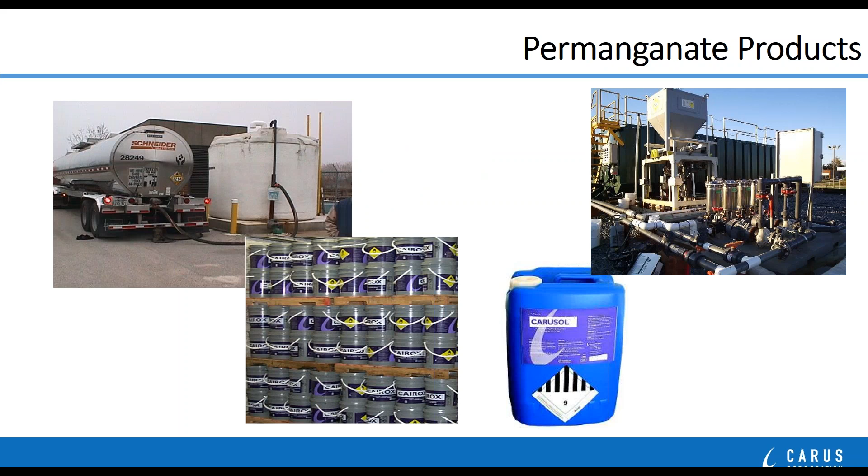The historic workhorse of the permanganate world is dry crystalline potassium permanganate. Potassium permanganate is the product that is manufactured at most manufacturing locations because it is relatively easy to drop out of solution at a very, very high purity. So our crystalline dry products are marketed under our brand name CAIROX, and we can offer a variety of different grades of this product as we manufacture and manipulate it in our plant here in LaSalle, Illinois.

So typically the first product that drops out is what we call technical grade material. Technical grade is always at least 98% purity, and it is a great product to use, in particular if you're going to be mixing the permanganate as a water solution and then feeding it as an aqueous solution or an aqueous liquid.

The sister product to technical grade is what we call free-flowing grade. So technical grade material is hygroscopic. That means that it likes to pick up moisture from the air. And so when relative humidity is high, such as in water plants or wastewater plants, it will have a tendency to lump or cake together after it's been exposed to the air.

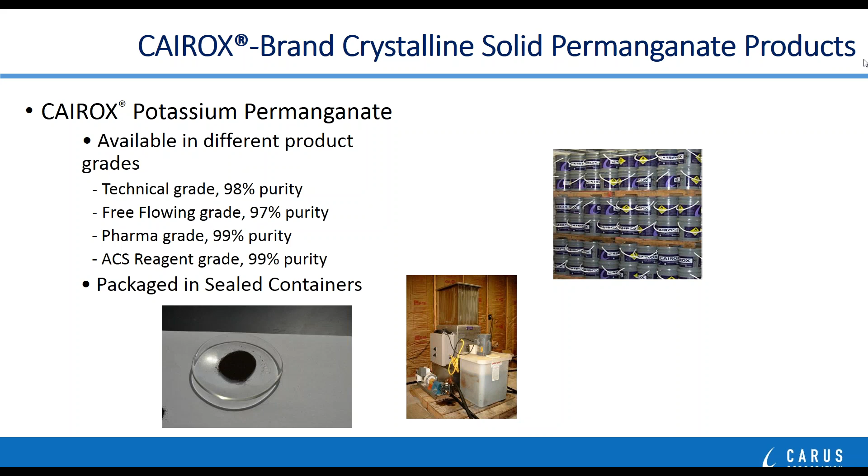So this is a less dusty material, and because the nuggets are heavy, when you broadcast them into the lagoon or pond water, they will tend to sink and treat the water all the way through the water column, and depending on the depth, they will often make it all the way down to the bottom of the lagoon. If that's where the problem is occurring, then we can treat down there at the lower depths.

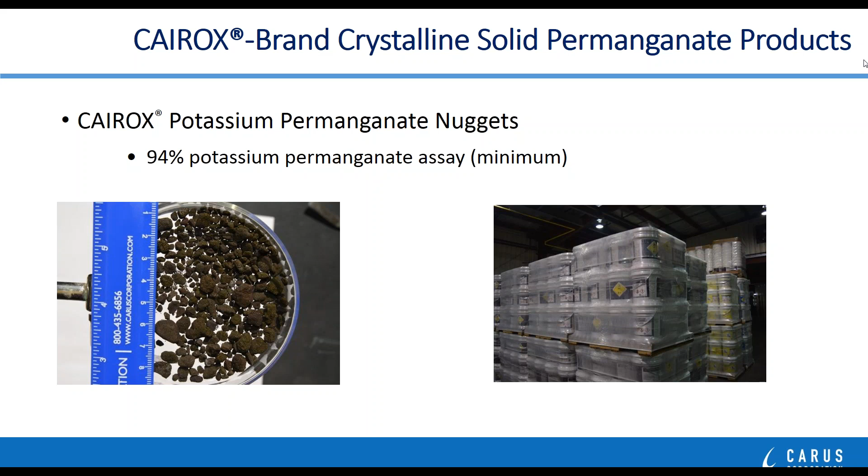The amount of permanganate released and the life of a tablet depends on the speed of the water flowing past it. So a higher velocity water dissolves the pellets more quickly. A slower moving water dissolves them slowly.

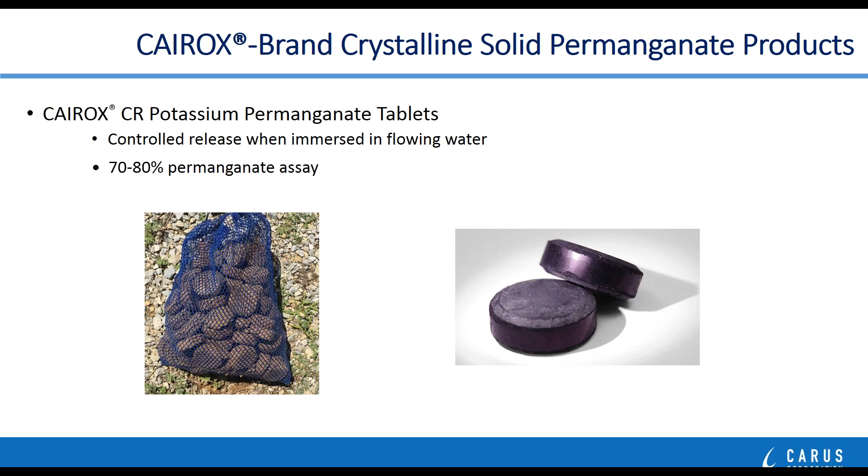If we move away from the dry crystalline products, then we can talk about pre-mixed concentrated liquid products that are available under our brand name CARUSOL. They are available in 2 different types of concentrations. The first is 20% active ingredient, and the second, CARUSOL C, is available as a 40% active ingredient.

In the case of both the dry crystalline material and these concentrated liquids, they're very stable when they're held or stored in their sealed package containers. The stability really is measured in months and in years, so that they can be stored and used over a long period of time.

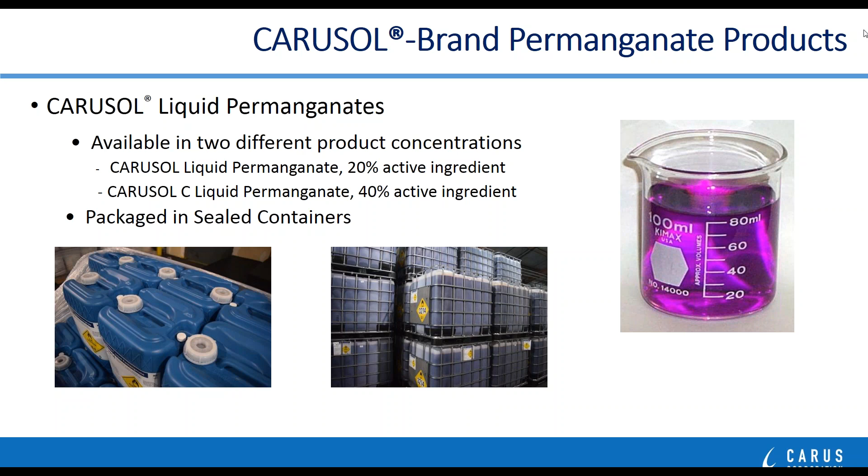So let's talk a little bit about what permanganate really is. The permanganate ion is MnO4-1, and it is available when you manufacture it in a variety of different salts. The two most common salts are the potassium permanganate, KMnO4, and the sodium permanganate, NaMnO4. But there are other types of cationic salts that you can make as well.

Permanganate is an oxidizing agent, and it's what we consider to be a stable oxidizing agent. That means when we manufacture it, we can put it into a drum, it can be stored, it can be delivered to the customer site and used at some time in the future. It does not have to be generated at the site where it's going to be used.

And we make permanganate by starting with manganese dioxide ore. It's a material that is mined out of the ground. Manganese is a common constituent of soils around the globe. And we add energy and oxygen to that manganese dioxide and raise the potential of it up until we get to the permanganate ion, MnO4. Now, when a customer buys permanganate and uses it, they are essentially extracting that energy and that oxygen out of the permanganate, and the permanganate returns to almost its original MnO2 form.

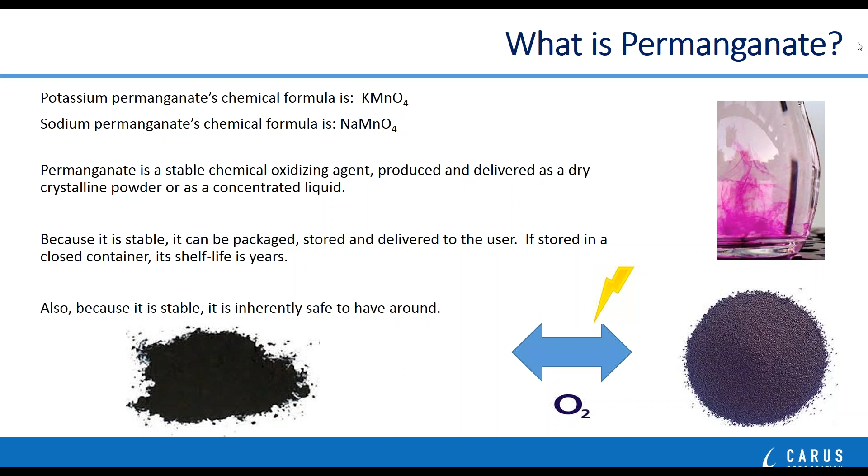From a chemistry standpoint, permanganate can be sort of lumped into one of two buckets. The first is, of course, that permanganate is a manganese compound. I mention that in particular because it can be confusing, because magnesium is also one of the common elements. Calcium and magnesium are the constituents of hardness in water supplies, but that's not what permanganate is. Permanganate is a manganese compound and is often regulated and controlled under that category.

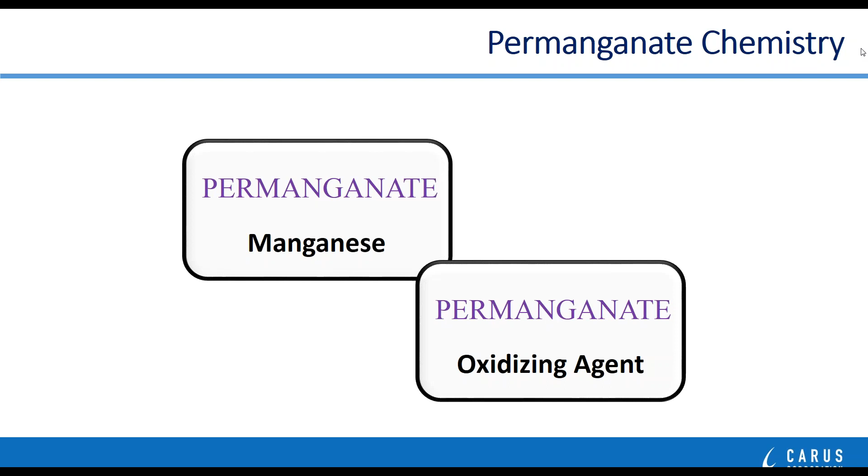Permanganate is also an oxidizing agent. As I mentioned, we manufacture it by adding oxygen and energy to the manganese oxide ore to produce it. So an oxidizing agent, in very, very simple terms, is really nothing more than a form of energized oxygen that's being delivered to the site where it's going to be used. That energy and that oxygen can be extracted by the customer who's going to use the product.

Now, oxidation as a term shouldn't really surprise us much. It's derived from the word oxygen. And of course, we should be familiar with oxidation reactions because we live in a world where our atmosphere is highly oxygenated, so we're surrounded by oxygen every day. So some of the more common oxidation reactions you might be familiar with is rusting. So ferrous metals reacting with the oxygen in the air to form iron oxides and giving you that distinct reddish brown rust color. That's a very slow process, can take many, many days, many, many years for that rust to form.

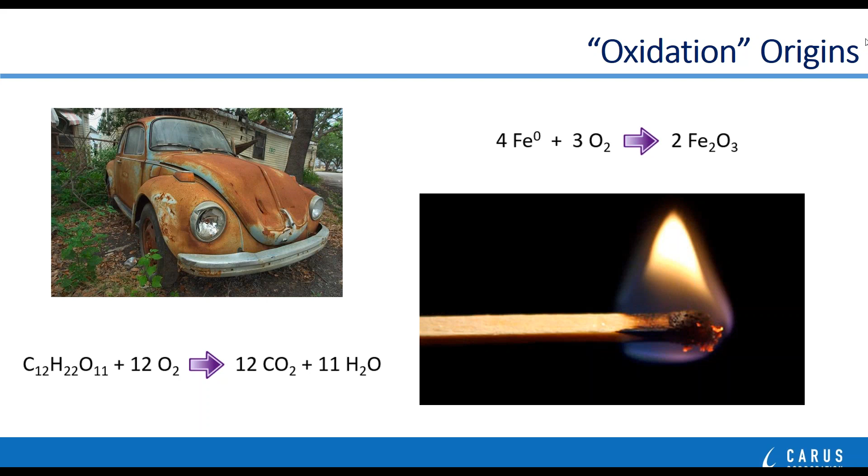Now, to the chemist, they're a little bit more exact when they talk about oxidation chemistry. And to them, it really is an issue of transferring electrons from one compound to another. So there's always one compound that's releasing electrons and one compound that's accepting them. So oxidation is always coupled with a process called reduction. And if you read about these sort of reactions, you will see it often referred to as oxidation reduction reactions.

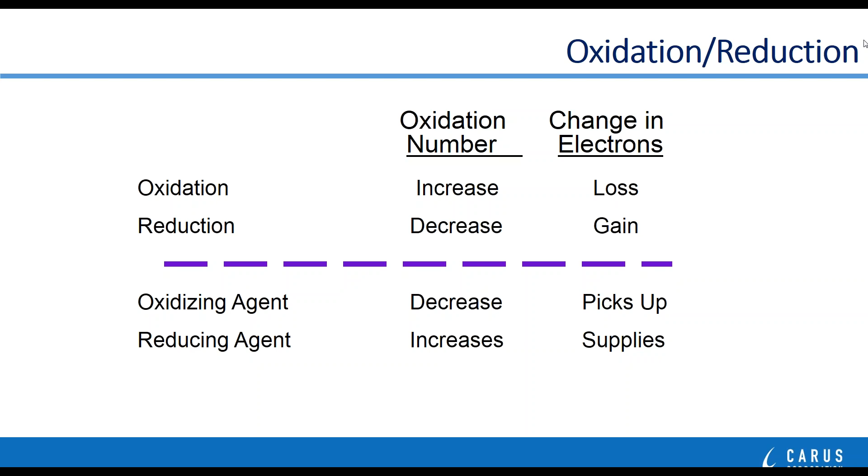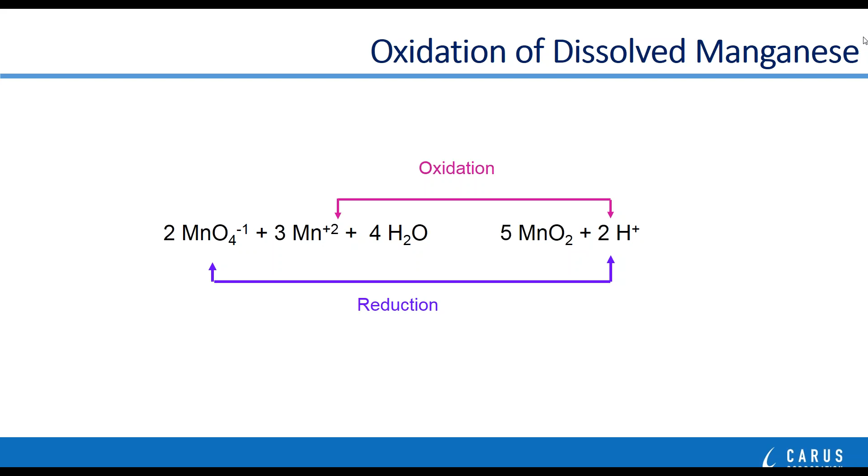Now, there are not only oxidation reactions with inorganic materials, there are oxidation reactions with organic materials, which are carbon compounds, usually represented by compounds of the living cells. Here's an example of an oxidation reaction that is not uncommon for permanganate and organic materials. And by that I mean a complete oxidation reaction would really go to carbon dioxide and water. That's sort of what happens when you have a burning match.

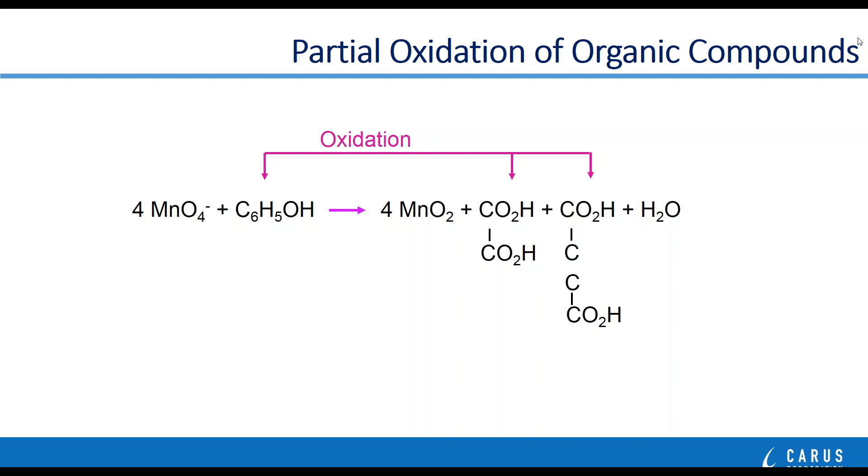But in water plants or water systems where we're using permanganate, we generally don't go that far to completion in any case. What we have is partial reactions that take place where we fragment a large molecule and we cut it up into 2 or 3 or more smaller molecules. And the hope there is that whatever we're trying to accomplish, whether it's taste control or odor control or toxicity removal or color removal, all of that is accomplished by doing this fractionation or this partial oxidation reaction.

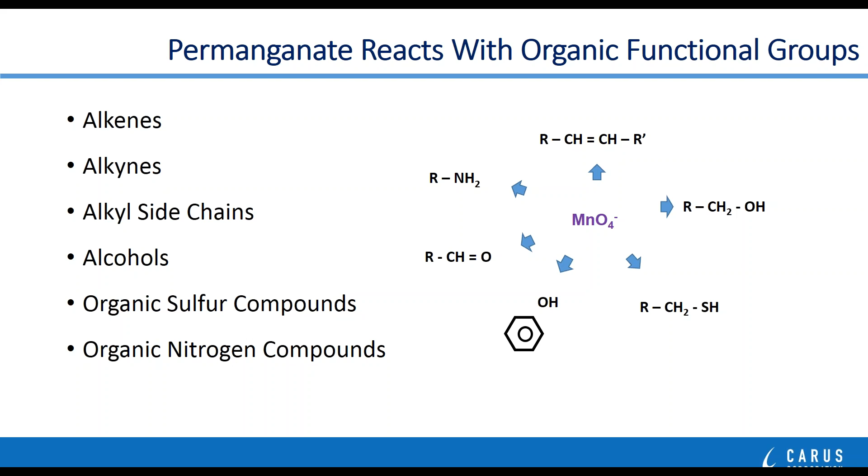Now, how does permanganate differ from a lot of other oxidizing agents? Well, permanganate likes to react with very specific organic functional groups. And you can see them here both by diagram and by text. So we have alkenes and alkynes, which are double bonded and triple bonded connections between carbons. Permanganate loves to attack at those points. You have alkyl side chains that permanganate will react with, for instance, alcohol groups, or even sulfur groups or nitrogen groups that might be attached to an organic compound.

There are some cases where if you go to extreme pH conditions, you can change that reaction. So under very acidic conditions, at less than pH 3, for example, the permanganate ion, MnO4-, exchanges 5 electrons and goes to soluble manganese 2.

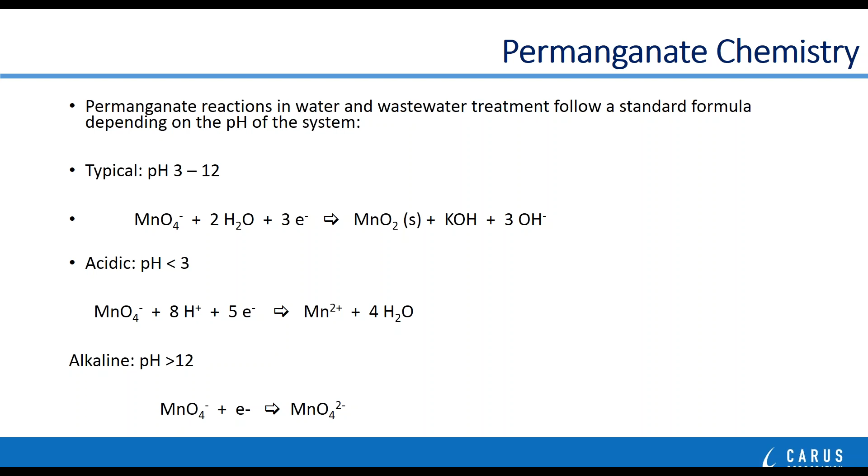And then finally, under very alkaline conditions, greater than pH 12, it is possible to just automatically lose 1 electron just while the product is sitting in solution. And you go from permanganate, MnO4-, to manganate, MnO4 2-. The fun part about that reaction is the permanganate ion, which is purple or pink in color, changes to a very greenish color when you lose that 1 electron.

So let's talk a little bit about oxidation chemistry. It's really quite versatile and it's really a lot of fun. There are really 2 portions to oxidation chemistry. One is where you're taking small products or converting products from one form into another form, where you're building a molecule or converting or synthesizing a molecule of some type. That's the reactions that you typically find when you go to a textbook and look up oxidation chemistry, because most of the research is done on how oxidants can help you to produce or manufacture some type of active ingredient.

Now, in the environmental applications that we'll be talking about, which are typically water purification or air purification, we're generally talking about breaking a large molecule down into its smaller components. So when we're trying to destroy something or purify something by removing a contaminant, we're talking about the other side of this equation, where we're taking big molecules and breaking them down into smaller ones.

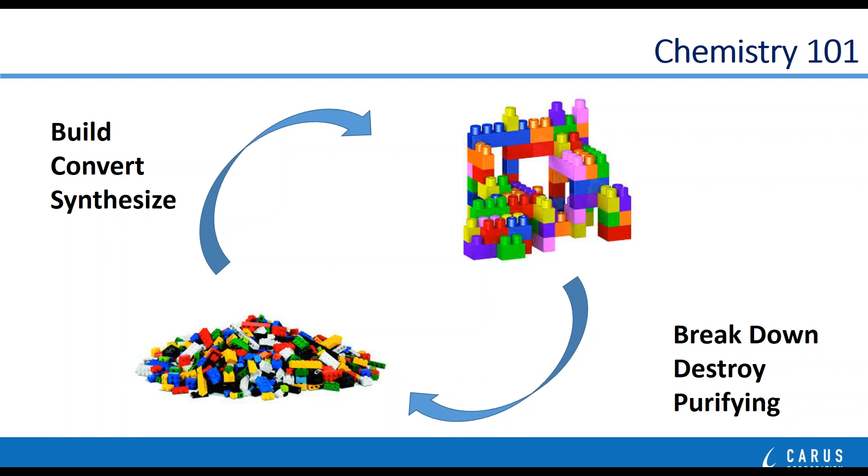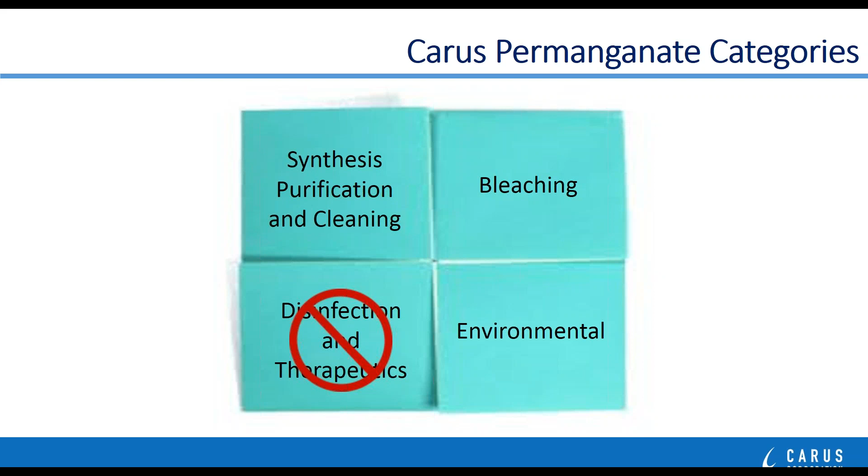So let's talk a little bit about the different types of environmental applications. First, let's start off with soil remediation. It's often referred to as in situ chemical oxidation, ISCO. This is particularly popular when the contamination is due to the dry cleaning or degreasing compounds, trichloroethylene or perchloroethylene.

And there are also cases where you can do an excavation and treat and then put the treated soils back in again. So there are a variety of different techniques that are used for injecting or applying permanganate into contaminated soil to remove

trichloroethylene or perchloroethylene. Of course, historically, one of the major applications, and also currently for potassium and sodium permanganates, are the oxidation purification of different drinking water supplies. Drinking water applications really date all the way back to the late 1800s and early 1900s, when oxidizing agents in general were first looked at for water treatment.

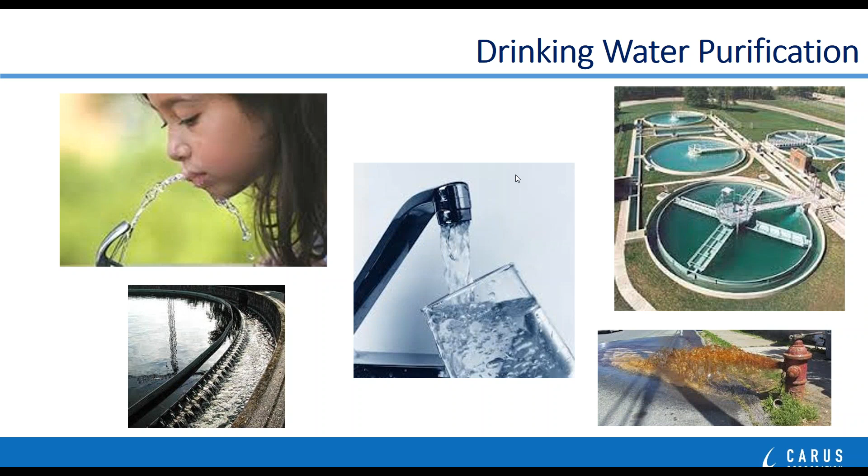Now, permanganate can be applied to both surface water supplies and to groundwater supplies. And I like to look at the application reactions in terms of the type of compounds that we're oxidizing. So you'll see that I have them divided into the man-made or naturally occurring inorganic types of chemicals that we're reacting with, and or the natural or man-made organic material that we may be reacting with.

There is some overlap between surface water and groundwater when we talk about the inorganic materials. Iron and manganese are the most common that we're oxidizing and removing by precipitating them out as solids, and then our clarification or filtration processes can remove them from the water. You can also see sulfide material in either one of those water sources.

And in groundwater supplies, there is some arsenic oxidation and removal and some radium removal. And we'll talk specifically about radium removal because it's a little unusual. There is no oxidation reaction that takes place there, but there is an absorption reaction.

When we talk about organic matter, typically groundwater supplies don't have a lot of organic material in them, although you can run into some cases where you might see some colored water, especially if it's from a well that's not very deep and may be influenced by surface contamination. But most of the organic material we see is present in surface water supplies, and it presents itself in terms of taste, off tastes, or off odor types of situations.

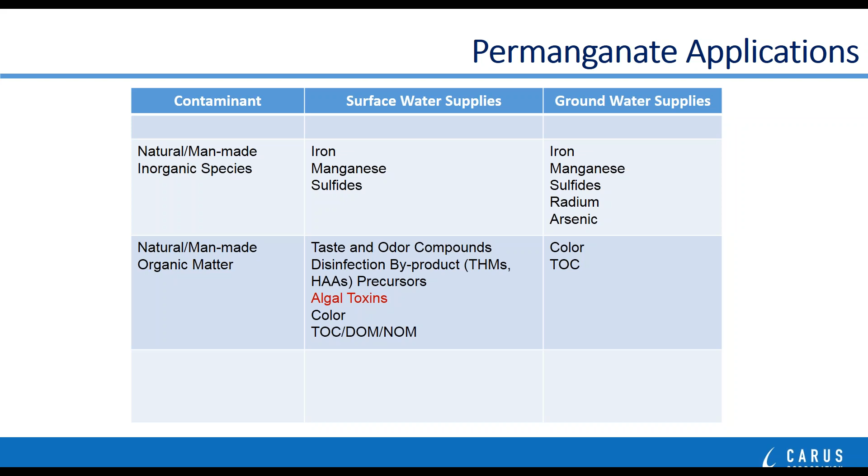One of the newer organic materials that we're looking at and that permanganate is oxidizing is organics that are produced as algal toxins. Of course, color can often be due to some type of organic material, so color removal is an application. And then there is some very small amount of total organic carbon or natural organic material oxidation that can go on with permanganate as well.

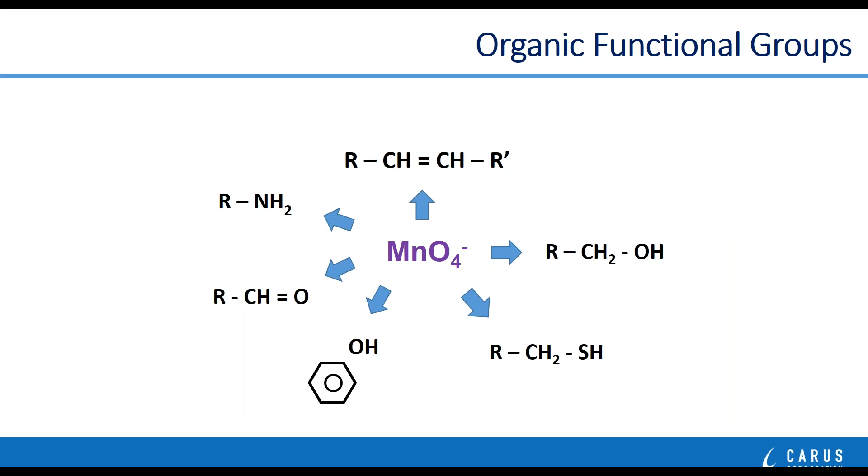So let me go back to our slide that points out that permanganate likes to react with very specific functional groups on organic compounds. So why is this important? Well, it's important because a compound has a specific taste or a specific odor, often because of its structure and because of the functional groups that are associated onto that backbone structure.

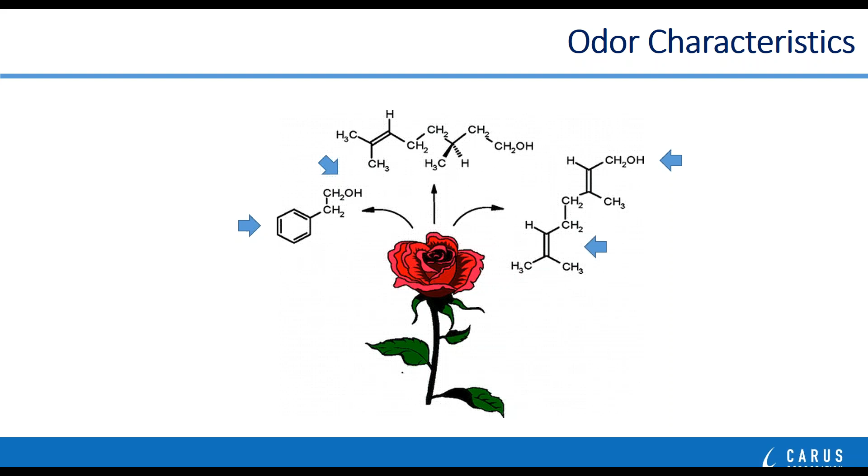So it turns out that permanganate is quite effective at controlling tastes and odor compounds, whether they're in water or whether they're in air. And you can see that these functional groups on these compounds can be attacked by permanganate because it likes to go after those functional groups immediately. The nice thing about attacking and eliminating the functional group is that the taste or the odor will go away even if we haven't fully degraded the complete molecule down to CO2 and water.

The inorganic oxidation reactions are easier to talk about because there aren't very many of them. I've already mentioned that permanganate is used in particular to remove manganese from water supplies, but it also is used to remove iron. It will oxidize arsenic 3 to arsenic 5, and then arsenic 5 can be absorbed onto the manganese dioxide and removed through the filtration process.

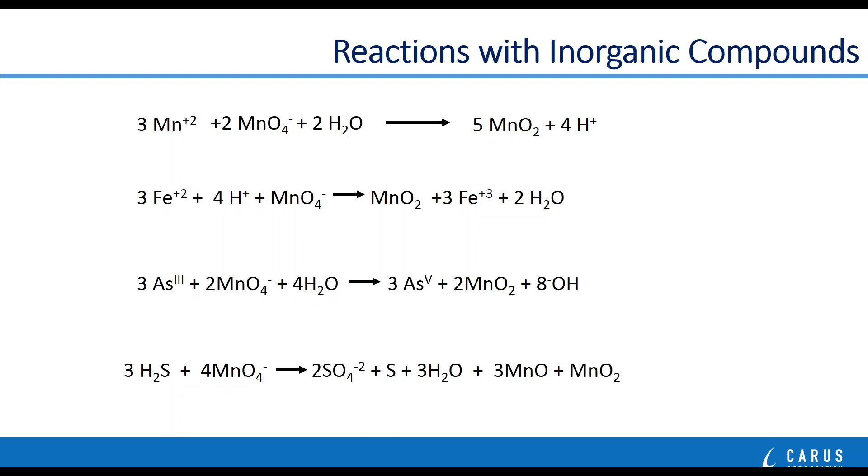And permanganate reacts with hydrogen sulfide or other sulfide compounds to deodorize it and form sulfates as the byproduct. Here is the reaction again with permanganate and soluble manganese, and you can see the formation of the manganese dioxide as a byproduct.

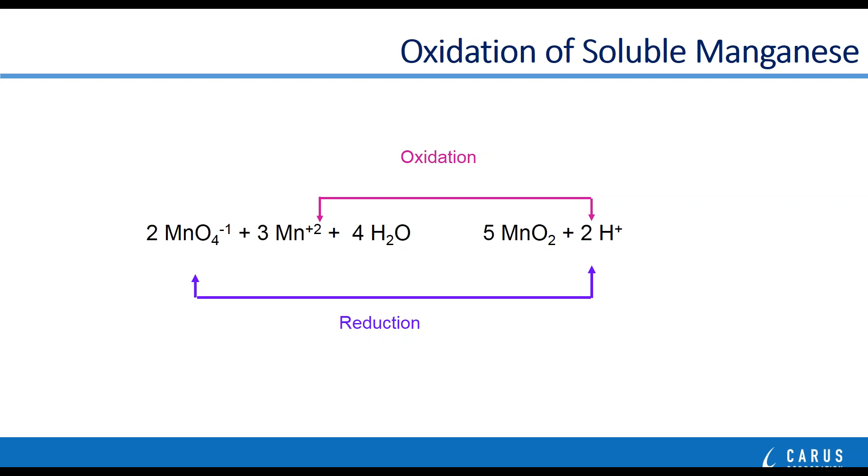That's important to know because, let me say again, the manganese oxide has a very high surface area. It's a floc material and it has a slightly negative charge. Because of that characteristic, it likes to absorb monovalent or divalent positive cations and remove them from the water supply.

Now, there's one very practical application of that currently in groundwater drinking water treatment, and that's the removal of radium-226 and 228. It turns out that radium likes to absorb onto manganese dioxide, and it can then be removed from the system on the plant's filter.

So in these particular cases, we're not doing any kind of oxidation with permanganate. We're actually preforming what is called hydrous manganese oxide, or HMO, by reacting permanganate with manganese sulfate, producing the HMO, and then injecting the HMO into the water supply to absorb and remove the radium.

But keep in mind, anytime we're treating water or wastewater with permanganate, and we're producing freshly precipitated manganese oxide, we have the capability to absorb and remove certain types of positively charged cations.

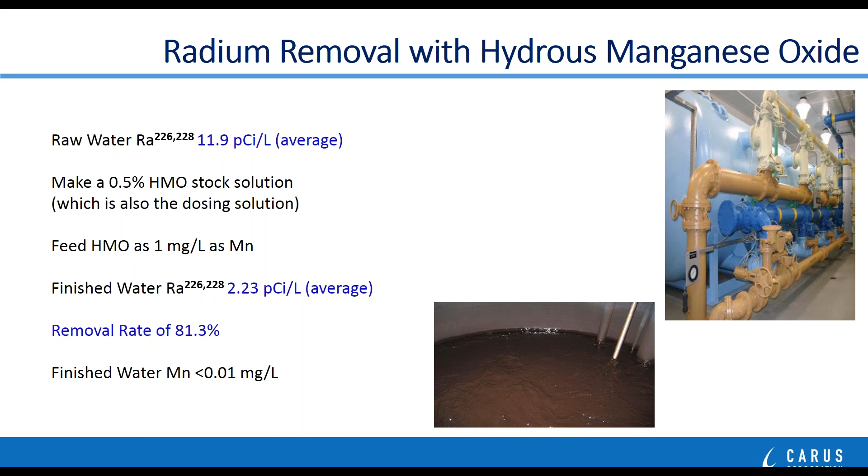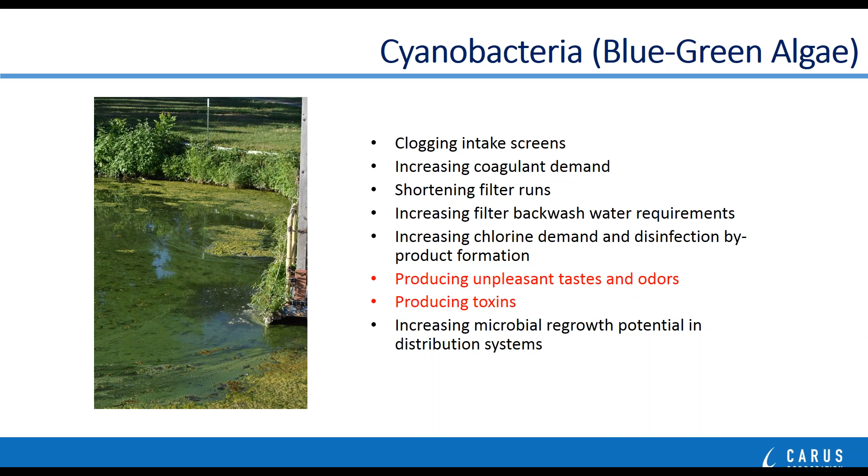But I would look particularly at the fact that they produce unpleasant tastes and odors, and now we know that they also produce different kinds of toxic material when they're growing, especially in very high concentrations. So we've known for a long time that permanganate is good for odor control and taste control in water treatment, and it turns out that those compounds are a result of the growth and activity of algae,

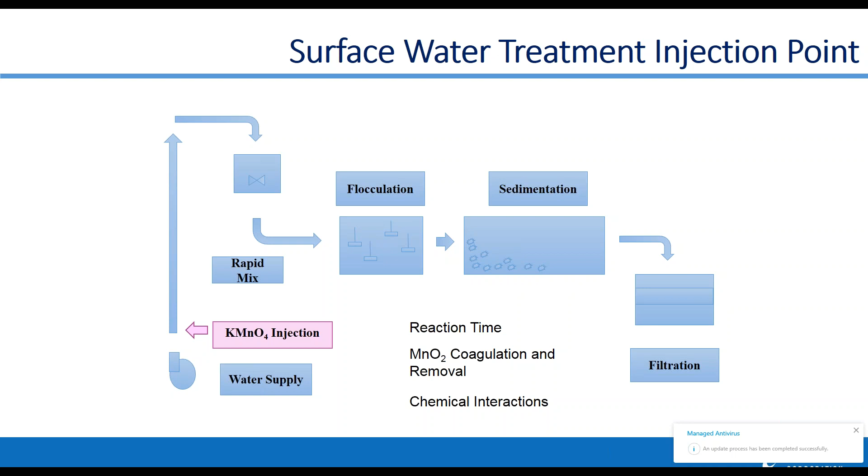And then finally, sometimes there are other compounds that permanganate can react with. Typically, powdered activated carbon reacts with permanganate. So we try to split the permanganate feed away from the carbon, which may be fed, for instance, here at the rapid mix area. So it gives us some time between the two injection points.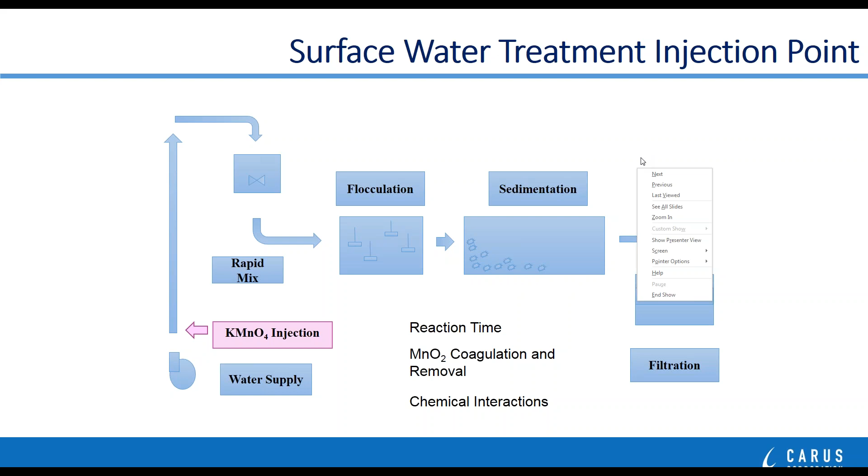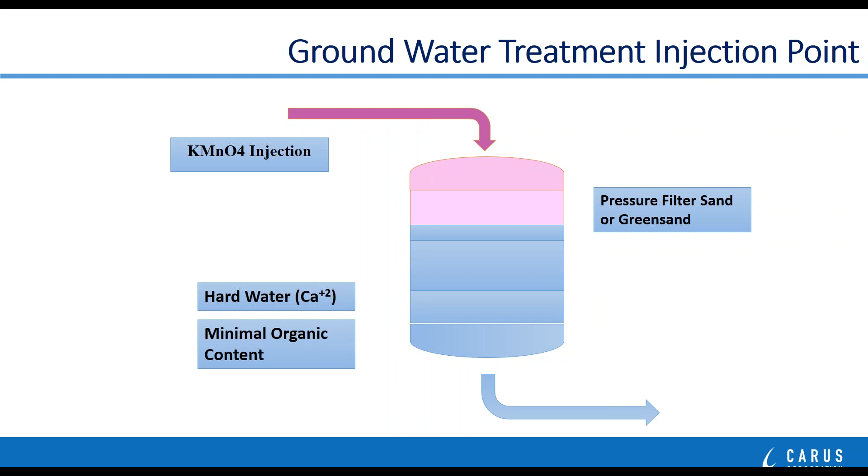In a groundwater supply, there's often not a lot of time, but because we're mostly reacting with iron, manganese, and sulfide, all of those reactions go within seconds to minutes. So the time that it takes from permanganate injection to the water entering the top of a pressure filter and the little bit of time it has in the headspace is sufficient to allow permanganate to do that reaction, convert those materials into solid particles so that the filter will remove them.

Now let's switch over to wastewater treatment, and in particular, municipal sanitary wastewater treatment. What we see in wastewater treatment is that there are a lot of sulfur compounds that are produced, and all of these sulfur compounds have very distinctive, unpleasant odor characteristics, and you can see them listed here in the center column. But also what's important here is the column on the right shows you that the amount of these materials in the air only has to be very, very small in order for the human nose to recognize that they are there. So that's the threshold odor level.

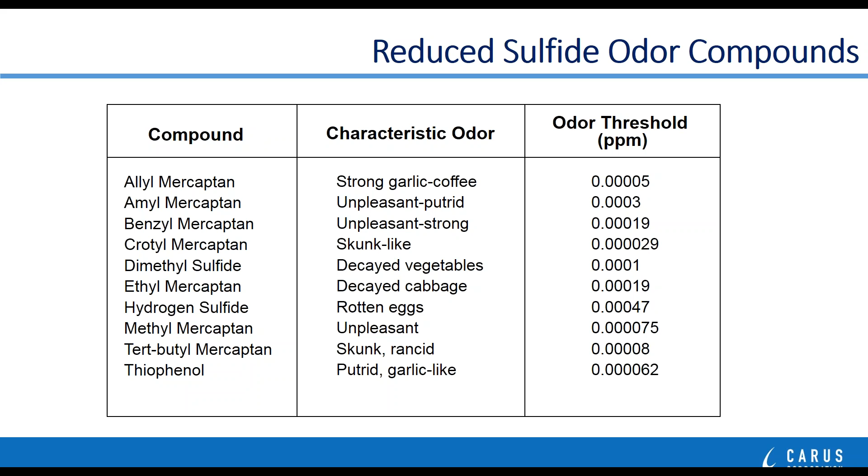And so they create quite a difficult situation for plant operators because it doesn't take much of these compounds to produce an unpleasant odor complaint situation. You can see that most of the materials listed here are mercaptans. These are organic sulfur compounds, but you also see hydrogen sulfide listed on here, and permanganate reacts with all of these particular compounds.

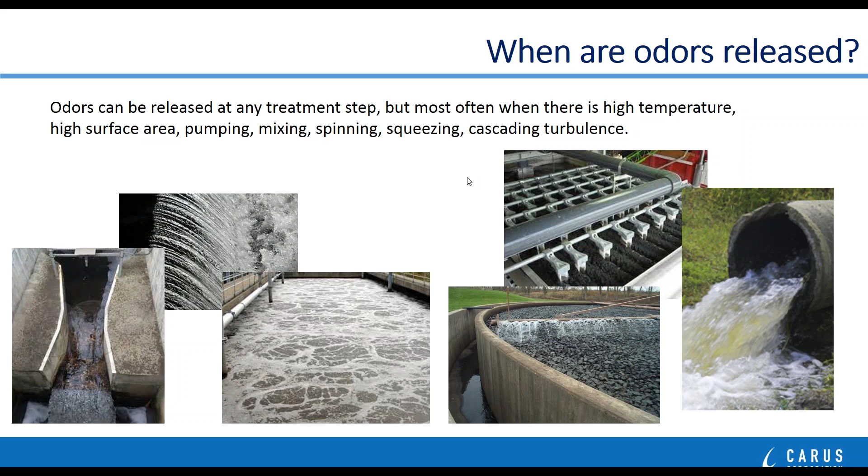So where are odors most prevalent in water treatment? Well, they're very volatile, so they like to be released whenever you create turbulence in the system. So any of these situations that you see here, where we're spraying the water or it's falling over a weir trough, it's coming out of an open pipe or going through a Parshall flume, or in the case of even just aeration processes where we're blowing fine bubble air through the wastewater, all of these situations will strip the odors into the surrounding atmosphere.

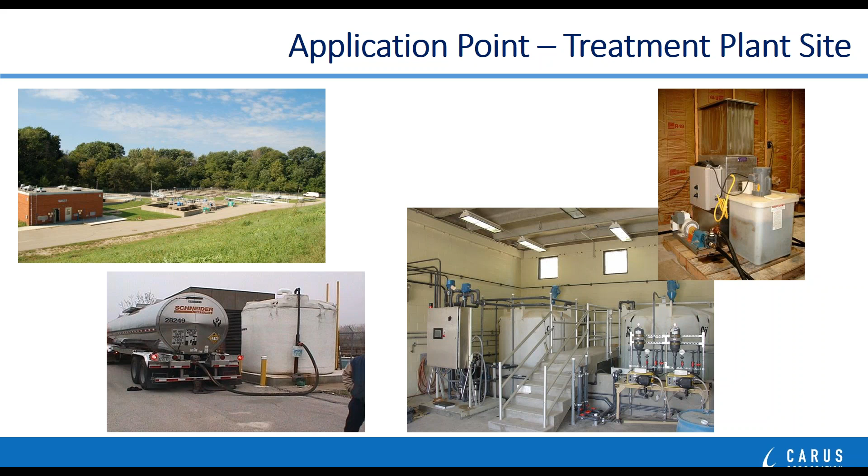So instead of identifying permanganate uses in terms of what we're reacting with, because the compounds we're reacting with are only few, we generally talk about wastewater treatment in terms of where permanganate is applied. So here you see a situation where permanganate is being used at the treatment plant itself, typically where the collected wastewater enters the headworks of the treatment process, going through the screening areas. It can also be applied between the primary and secondary clarifiers, where there's often odor produced in the primaries. And then in some recycle streams that are collected in the plant and returned back to the headworks, we can treat those as well in order to deodorize them.

One of the big areas in wastewater treatment for permanganate applications is in sludge drying or dewatering areas. When you concentrate the solids by thickening or by storage and then squeeze the water out of them on some type of mechanical device, you release odors into the air. And the nice thing about permanganate is what you're really buying here is speed of reaction. You may not have very much time for the oxidation reaction to be completed before you actually release the odors. So the fact that permanganate can complete that reaction in a matter of seconds to minutes is one of the advantages of using permanganate.

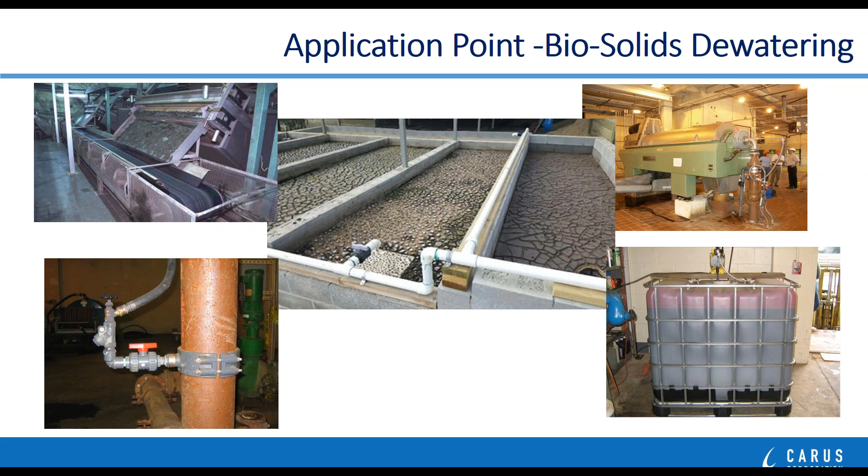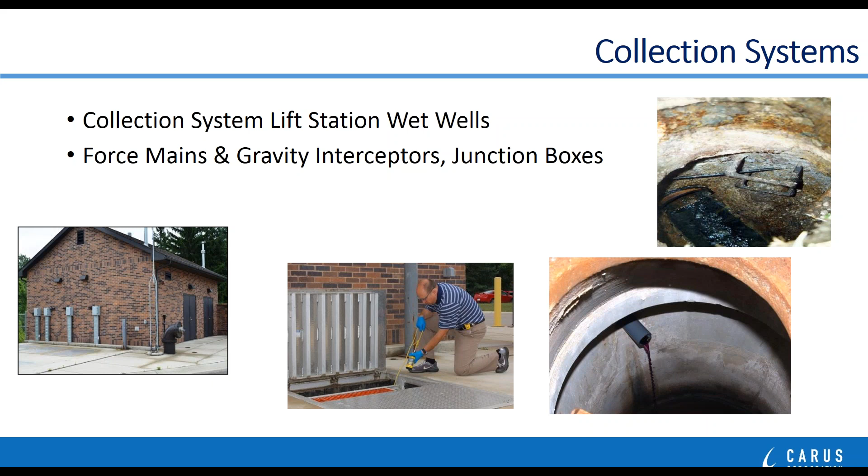We also use permanganate in collection systems. Collection system odors are quite common when there are long distances or storage of collected wastewater that allow it to go anaerobic and create reduced sulfur compounds. The situation is often in areas where you don't have easy access to them, so bringing in water utilities or electrical utilities may not be possible. These are areas where we can use the CR tablets quite effectively as well.

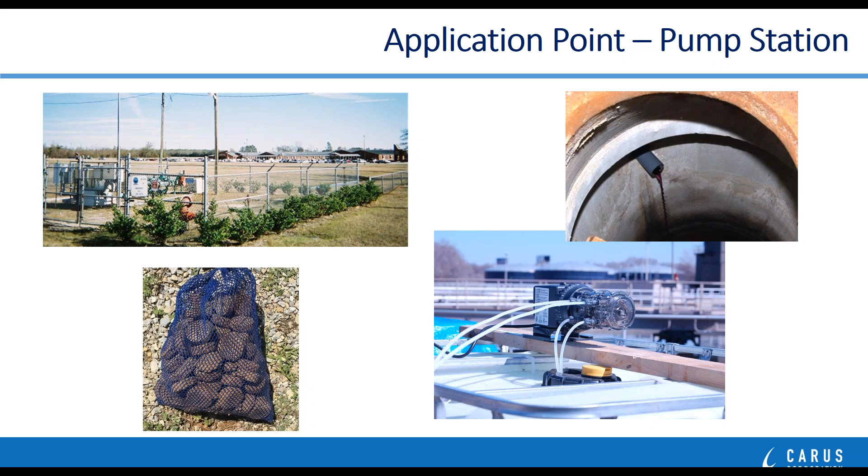If you do have power and you can run a metering pump of some type, then you can feed, for instance, here using a peristaltic metering pump and provide the correct dosage to the wastewater system. Manhole applications, here is one of those cases where the CR tablets are quite popular and very, very effective. You really control the dose in one of two ways. One is by how many pellets are being submerged into the flow, and the second way is how many bags you're actually hanging into the flow, depending on the size of the pipe or the size of the wet well that you're trying to treat.

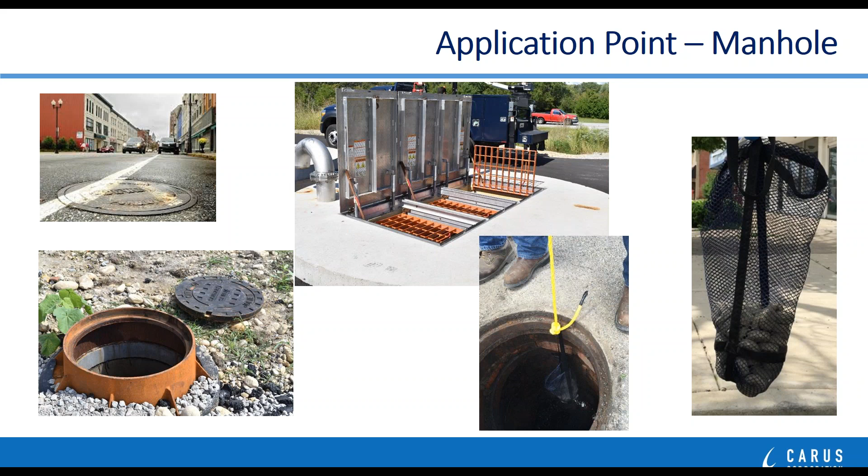Don't forget that wastewater odors and wastewater treatment can occur at industrial sites as well. We're not just talking about municipalities here. And often at industrial sites, you'll see situations where you may have aerated lagoons. Remember that aeration is really good at stripping odor compounds out of the water and into the air. So that's a really great place for adding permanganate. Permanganate and oxygen together are a very, very effective way of controlling odor compounds.

And you can treat different types of water bodies from the shoreline using metering pumps or gravity feed, or even, if the body of water is large enough, from a boat to actually distribute the permanganate around the surface of the water supply.

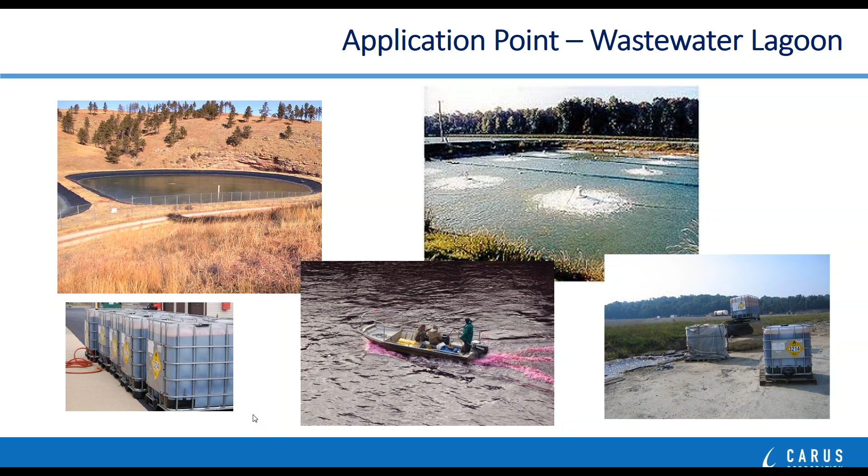One of the most recent industrial applications where we're treating odors is landfill leachate, especially when the landfill accepts construction waste materials, because often that waste material will contain different types of sulfur compounds. And when the rainwater leaches down through the waste, it leaches that sulfur material out, it goes anaerobic, and the bacteria produce high amounts of hydrogen sulfide.

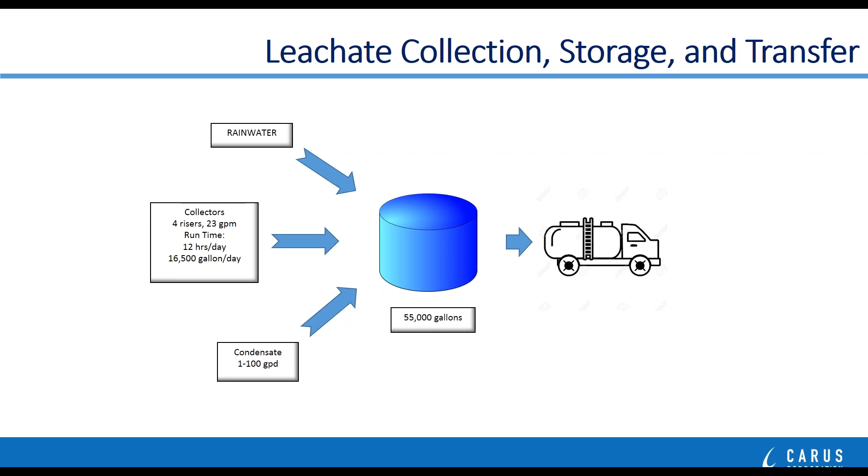Often we are treating at a collection tank that's on the sanitary landfill site and destroying the odors there. But often the odors are not released until the wastewater is actually transferred, typically to a local municipality. And that can be done by direct piping of the material to the collection system of the municipality, or if there's no direct pipe to the municipality, by way of a tanker truck. And when those two disposal methods are used, odors are often released at the municipal site. So pre-treatment with permanganate is a good way to eliminate that situation.

Iron and manganese in particular can also be found in mining leachate waters. So permanganate is used to oxidize and precipitate those compounds. The difficulty here is setting up the controlled feed system so that you can get it out into very, very remote areas. Don't forget that not only do humans generate odorous waste, so do animals. If you are operating a confined, intensive raising operation, such as hog confinement barns or cattle feedlots, permanganate has been used to control odors from those situations as well.

And now let me finish the presentation today by going back and talking a little bit about some of the interesting niche applications for permanganate, industrial applications that fall into these two categories of synthesis and purification and/or bleaching types of applications. The first in synthesis is that active ingredients of different kinds of compounds are often manufactured using permanganate as an intermediate oxidation step. Historically, one of the large uses of permanganates was in the production of saccharin, which was an artificial sweetener. That application is no longer as big as it was at one time, but there are still a number of pharmaceutical and agrochemical products that are produced using permanganate oxidation chemistry.

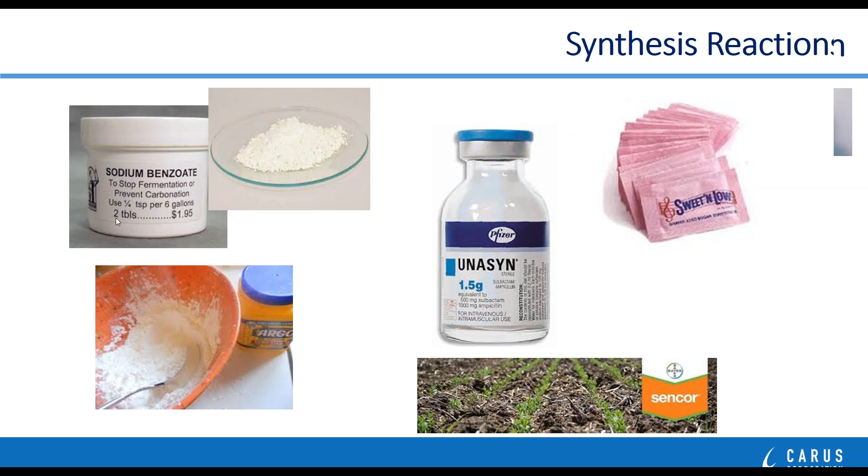There are purification types of applications, including zinc purification, where zinc is being produced from zinc ore, and it's necessary to remove iron and manganese from that ore supply in order to get a purified zinc. We have situations where permanganate is used to wash and oxidize impurities in food-grade CO2. And permanganate is also used to produce medicinal nitrous oxide by removing different types of impurities in that gas as well.

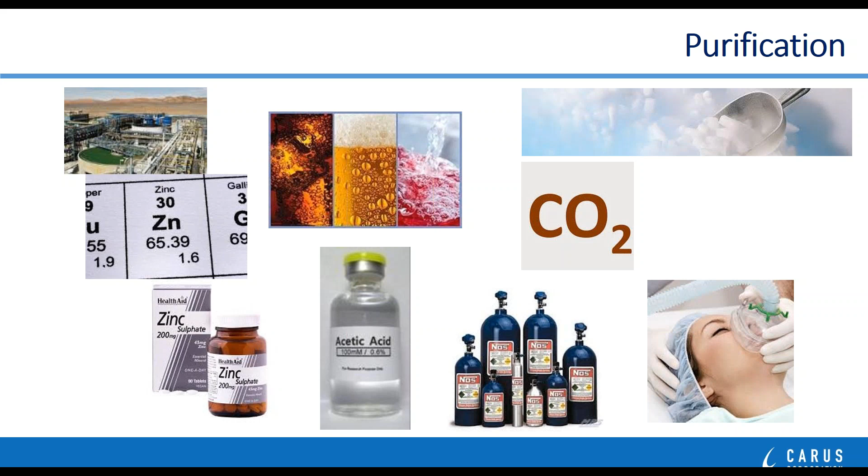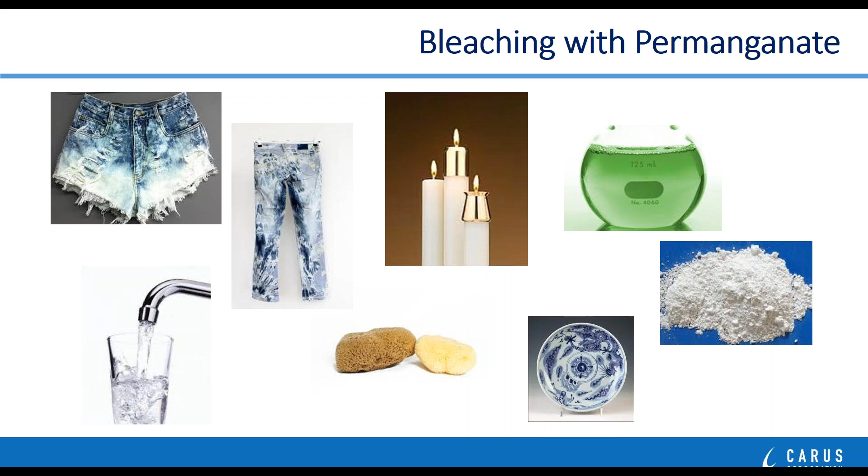Permanganate is used in a few interesting bleaching applications. Everything from producing very green phosphoric acid, as you see in the upper right-hand corner, to oxidizing and decolorizing kaolin clay that is used for making china. Permanganate is used to make white beeswax that is used to produce candles. And one of the fun applications is using permanganate to remove the blue indigo dye from denim so that you can make different types of washed out or distressed looking blue jeans.

Permanganate is used by the aquaculture industry, generally in the United States. This is the catfish industry in the South, the trout industry in the Pacific Northwest, and also the shrimp industry in the Southwest. And this is typically water treatment to remove impurities, to remove algal toxins, to remove taste and odor compounds, so that the fish don't exhibit any of these type of unpleasant tastes or odors.

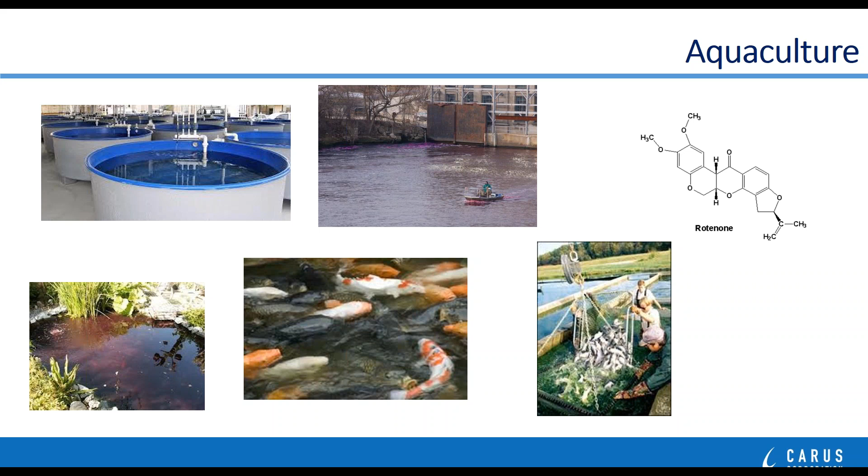There's also an application where permanganate is used to destroy a product that hatcheries and fisheries use, which is called rotenone, and they use it as a fish toxicant or a fish poison when they're trying to prepare a pond or a lagoon for stocking. And at the end of that application, permanganate is used to destroy that fish toxin and remove it from the water supply.

Permanganate is used to treat metal surfaces, to remove scale or dirty carbonaceous smut. And this is typically done in an acid cleaning line where a manufacturer is making ferrous rod or ferrous wire. And the reason you clean the surface of these products is because you're usually preparing them for some type of plating operation further on down the line. And you want that plating material to stick nicely, adhere nicely to the metal surface. So it needs to be clean and slightly rough.

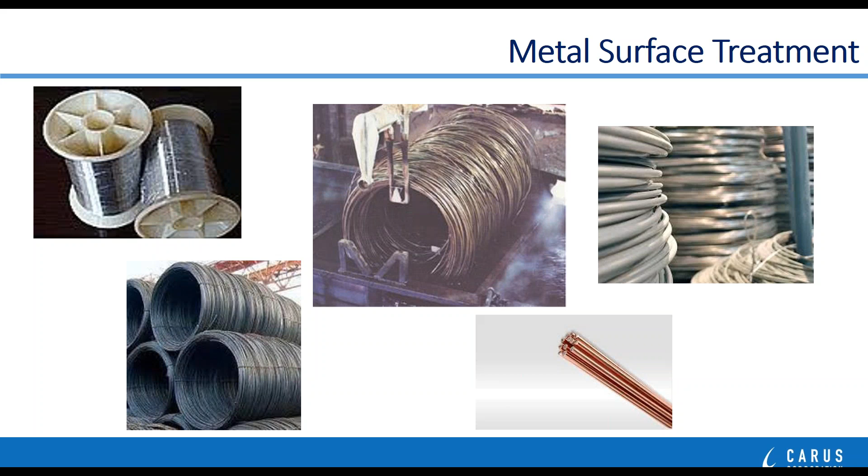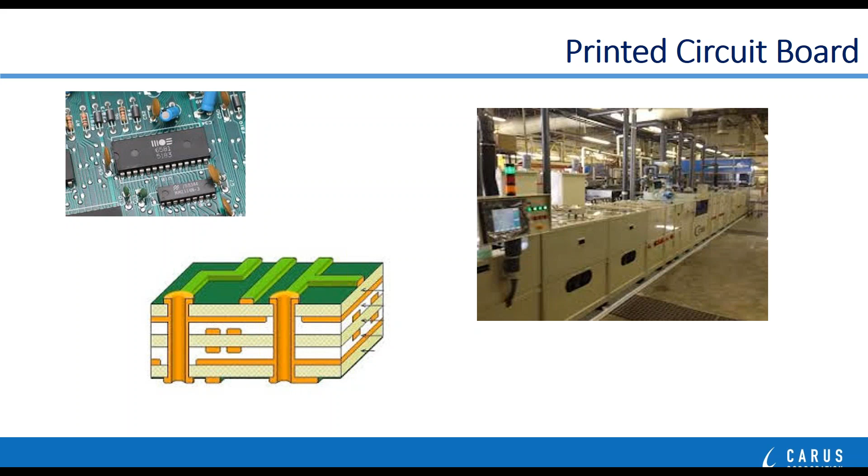This chemistry has also morphed over into the plastics industry. And typically permanganate is used to clean and etch the surface of printed circuit boards just before the copper plating is applied to produce the electrical connections between components or between layers of multi-layered circuit boards.

The surfaces can often be industrial. So for instance, heat exchangers in areas where there's a lot of organic material, such as a refinery or a food processing plant, can have organic material build up or organic slime build up on the inside of the equipment, and permanganate is used to remove that organic material.

In refineries, they produce a different type of scale. They produce a scale that is referred to as pyrophoric iron sulfide. If it is exposed to the air, it gets hot and can burst into flames. So before you can work on a piece of equipment or open up a piece of equipment that has pyrophoric iron sulfide scale, they will wash it with permanganate solution to destroy that sulfide and get rid of it so that they can do the maintenance that they need.

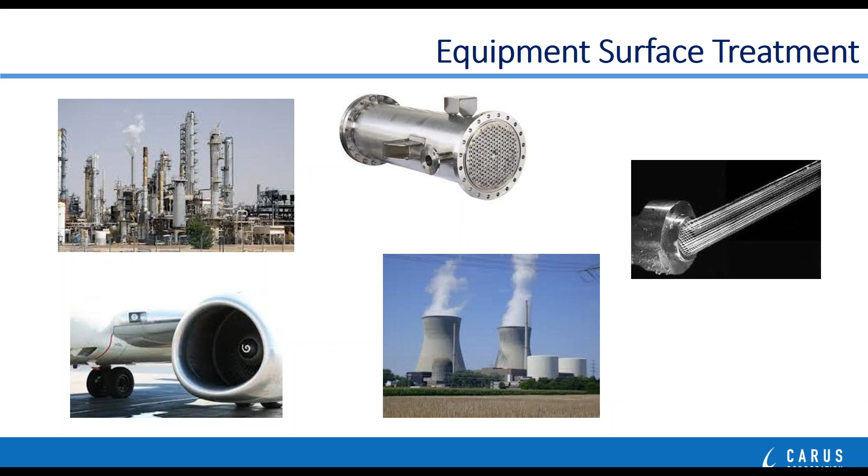In jet engines, there is often heat scale that is formed during the operation, and when the engine is brought in for maintenance, you need to remove that scale so the maintenance operator can inspect the part and make sure that its integrity is still good.

We're doing a lot of work in upstream and midstream oil and gas applications. Most of this is water treatment from the produced water that comes out of the oil wells themselves and involves the oxidation of sulfur compounds or the oxidation of iron. I already mentioned the oxidation and removal of pyrophoric iron sulfide in refineries. And here's one of those cases also where the freshly precipitated manganese dioxide can help by adsorbing and removing selenium from different types of water or wastewater streams.

So just to summarize then, what we covered today was a little bit about the different types of permanganate products that are available, the fact that they come in different grades that you should be aware of, and the fact that they come in a variety of different packages, from small packages to large bulk type deliveries.

Permanganate is used on a large industrial scale for chemical synthesis and purification reactions. It is also used in small niche bleaching applications. And then finally, it is used in a variety of different water and wastewater and air and soil treatment environmental applications where it's very, very effective.